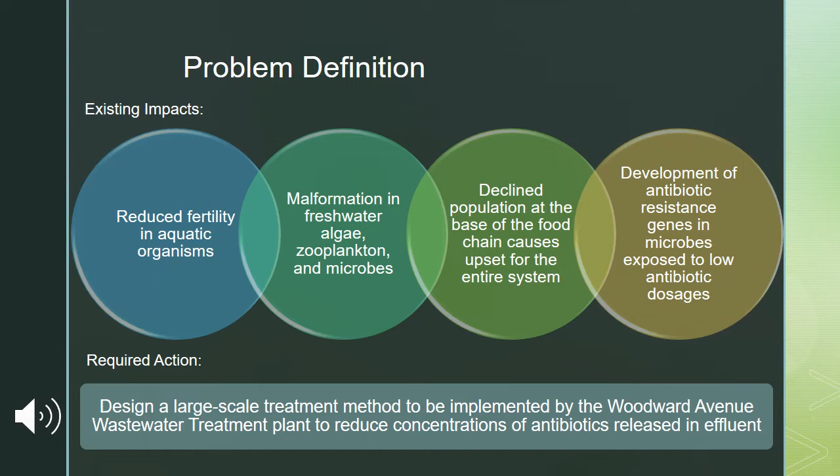As standards don't currently exist, we aligned our targets with the efforts of the Hamilton Clean Harbour Program, which set out to improve water quality and undo environmental damage caused by decades of neglect. The chosen antibiotic indicator for the project is sulfamethoxazole. Sulfamethoxazole of the sulfonamide group is among the most prescribed treatments for urinary tract infections in Canada. In North America, it is the antibiotic with the highest groundwater and surface water concentrations.

In Hamilton Harbour, sulfamethoxazole has a major presence in the effluent from the wastewater treatment plant and downstream, at concentrations of 23.8 nanograms per liter and 2.5 nanograms per liter, respectively. The incentive of this project is to address antibiotic contamination in Hamilton Harbour by proposing a reduction in future influent concentrations. This is an alternative to remediation of the present state of the harbour, which can also be separately investigated. We aim to reduce concentrations in effluent from Woodward Avenue wastewater treatment plant, having the largest contribution among other point sources that drain into the harbour.

An indicator antibiotic was chosen to be able to represent the overall degree of removal expected across all varieties of antibiotics, that is, sulfamethoxazole. In order to achieve this, we are proposing a membrane bioreactor system that can be retrofitted at the plant and will capture many antibiotics and other contaminants, targeting sulfamethoxazole. The treatment system will receive all influent currently received from wastewater collection, excluding the wet weather bypass system. 409 megaliters per day will be treated with a target removal efficiency of 65%, selected on the basis of several bench-scale studies that have claimed to achieve no lower than this percentage.

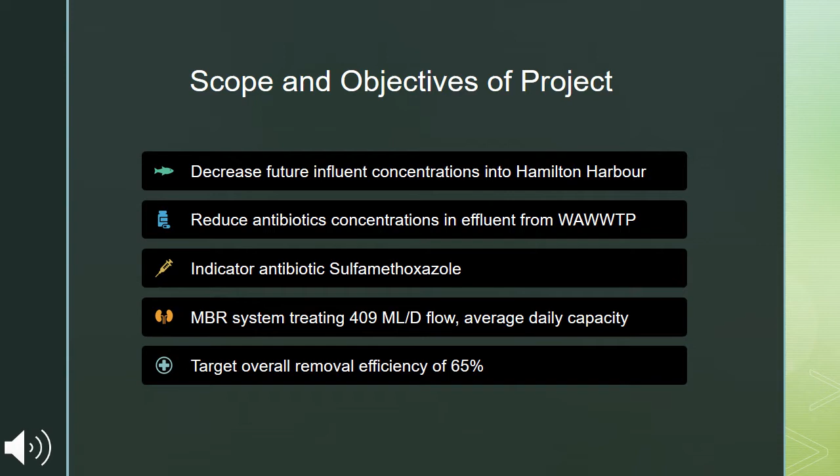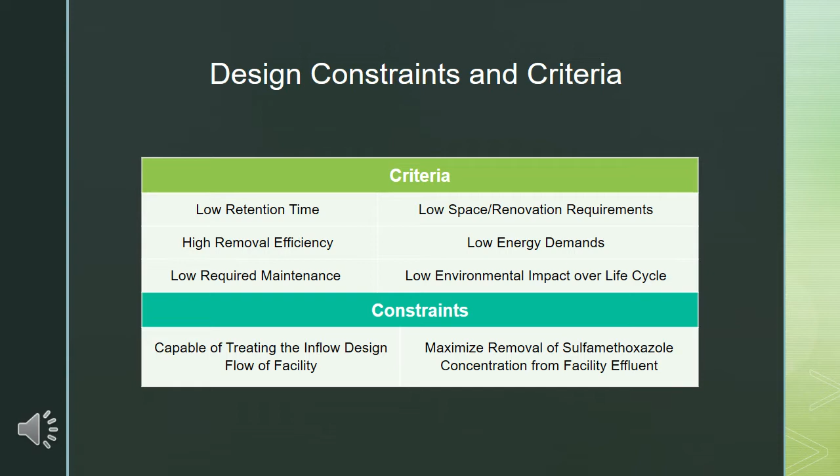As can be seen in the table below, there were a variety of criteria and constraints considered in our design. The criteria were, in general, selected in order to maximize the system efficiency while minimizing the economic and environmental impacts. Meanwhile, the constraints were selected according to the scope and involved maximizing the antibiotic concentration removal as well as the design capability to treat the facility influent rate. The design process began with researching site-specific information, including plant schematics, effluent requirements, primary effluent, and aeration data specific to where our design solution would be implemented.

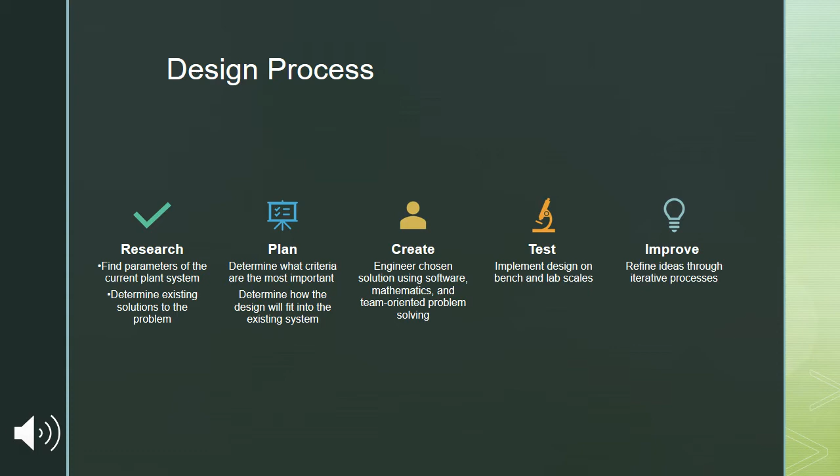Next, current solutions on the market were researched. Focus was placed on the least intrusive designs that could be retrofitted to the current plant. The most effective designs were advanced oxidation processes and membrane reactors. Preliminary calculations for cost, efficiency, and environmental impact were carried out and then implemented into a multiple criteria decision analysis matrix. After completing a sensitivity analysis, the chosen design was the membrane bioreactor.

To complete the technical aspects of this project, software such as SolidWorks and AutoCAD were used to model the design. OpenLCA and CapdetWorks were used to complete life cycle analysis of materials and preliminary costing of the design, respectively. Technical calculation knowledge was used from bio-wastewater treatment design, and membrane efficiency, sizing, and fouling treatment was determined. To keep all aspects of the project on track, a digital timeline was created in the form of a Gantt chart.

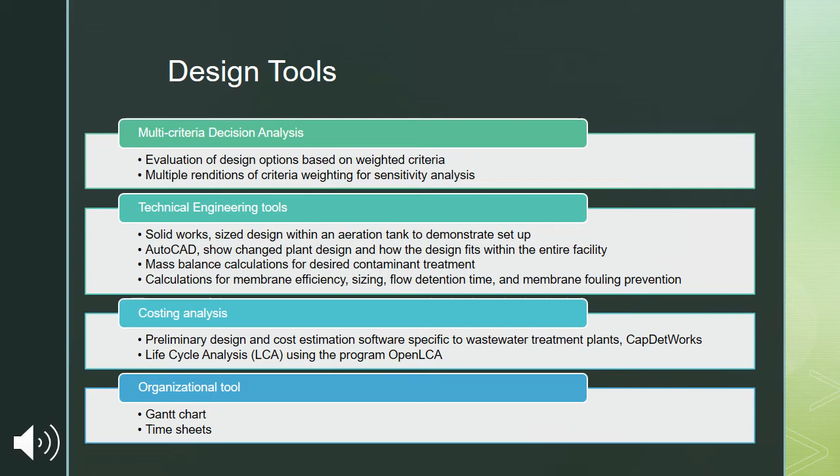The final design is a membrane bioreactor system that will integrate with the existing infrastructure at the Woodward Avenue wastewater treatment plant. A membrane bioreactor works by combining the commonly used activated sludge wastewater treatment process with high-level filtration. The wastewater treatment plant already follows the activated sludge process and has 8 aeration tanks in its north plant and 4 in its south plant. So, for our design, we will be integrating membrane modules into these existing tanks. Membrane bioreactor treatment will take place after preliminary and primary treatment stages. Given the high level of filtration, the existing secondary clarifier system can be removed, thus reducing the treatment plant's overall footprint.

As you can see in the diagram, the membrane bioreactor will consist of multiple membrane sheets stacked together into larger sets and submerged within an aeration tank. Treated water will be removed with the help of a vacuum. Sludge will also be removed, but some will be returned to the tank to help maintain biological growth. The return activated sludge flow rate will be about 81.3 million liters per day for the north plant and 40.2 million liters per day for the south plant.

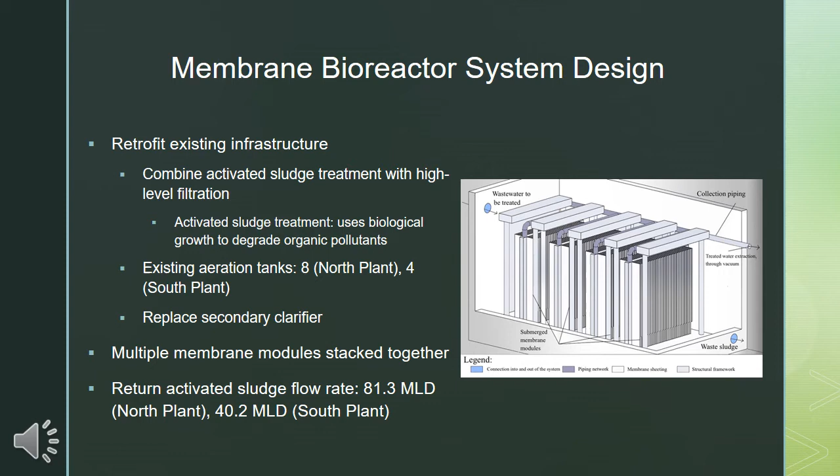Different parts of the membrane bioreactor system will require different materials. The polyvinylidene fluoride of the membranes will allow pore size to be adjusted relatively easily, while the stainless steel 316 of the submerged air mains will minimize corrosion. The exposed collection pipes will be made of polyvinyl chloride to protect them from sun decay. The membranes will have a configuration of hollow fibers, which will allow for ultrafiltration and the removal of antibiotic particles. The design of the membrane is based off an existing product called GE Zenon 500, which matches the criteria of this project. Approximately 11,600 to 18,100 membranes will be needed for each aeration tank, depending on the plant.

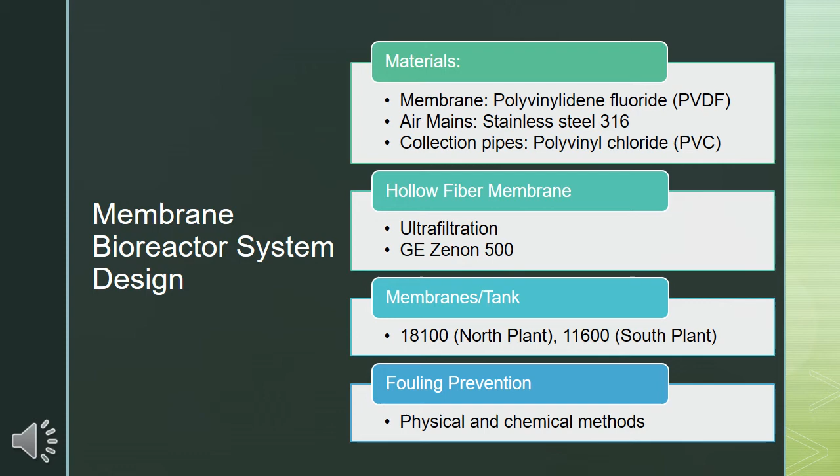The membranes will take up approximately 22% of the total tank space. Membrane fouling will be prevented through permeate relaxation cycles. For a 10-minute cycle, the filtration and permeate circulation will be on for 9.5 minutes and off for 0.5 minutes. This may be combined with backwashing, where permeate is pumped in the opposite direction to clean out the membrane. Chemical cleaning will also take place on a weekly basis using citric acid.

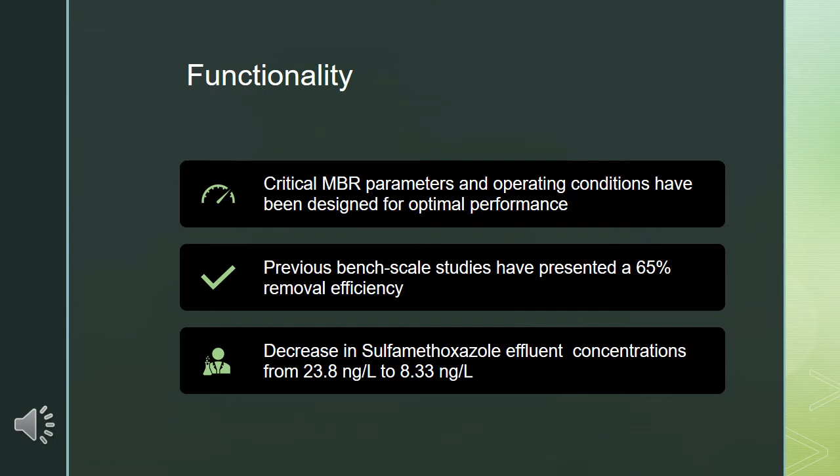When applied to the Woodward Avenue wastewater treatment plant, a sulfamethoxazole concentration decline from 23.8 nanograms per liter to 8.33 nanograms per liter would be observed. Safety precautions for workers include wearing personal protective equipment, which can include glasses with side shields, hard hats, full face shields, ear protection, gloves, and safety boots. Personal cleanliness practices, such as washing hands with antibacterial soap, will help reduce health risks. Education is also of high importance.

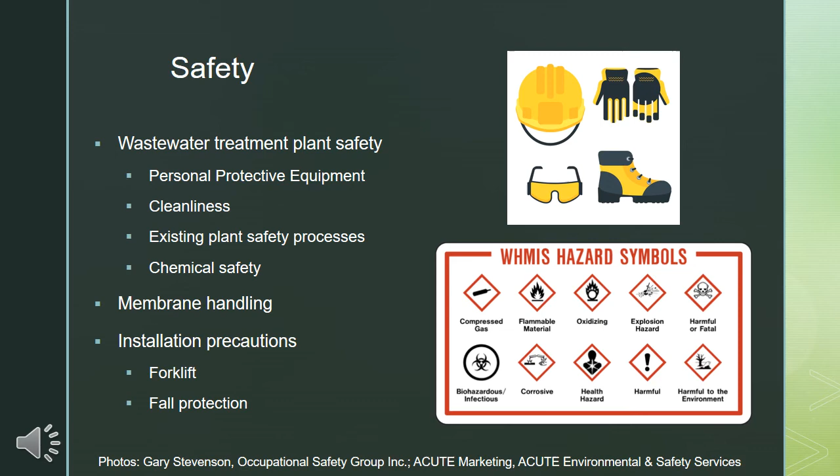Workers must be made aware of all plant safety measures such as emergency shutoff switches, eye washing and shower stations, and job-specific precautions. They must also be made aware of WHMIS symbols and chemical handling safety and be provided with material safety data sheets for any chemicals they may come in contact with. Membranes themselves should be kept moist at all times and protected from freezing temperatures, sharp objects, and entanglement. They should not be exposed to high-pressure washing. When installing membranes, workers must employ safe forklift practices when lifting membrane modules and wear proper fall protection when installing them, such as a harness and tie-off lanyards.

Hamilton Harbor is an area of concern due to its poor water quality and environmental health. 50% of the flows into the harbor are coming from wastewater treatment plants, including the Woodward Avenue plant. So improving the quality of its effluent has an important impact on the water quality in the harbor and the ecological health of the area. Our design is a form of ultrafiltration, which, in addition to antibiotics, can remove cryptosporidium, bacteria, most viruses and colloids, and some endotoxins or pyrogens, which are compounds that can cause illness.

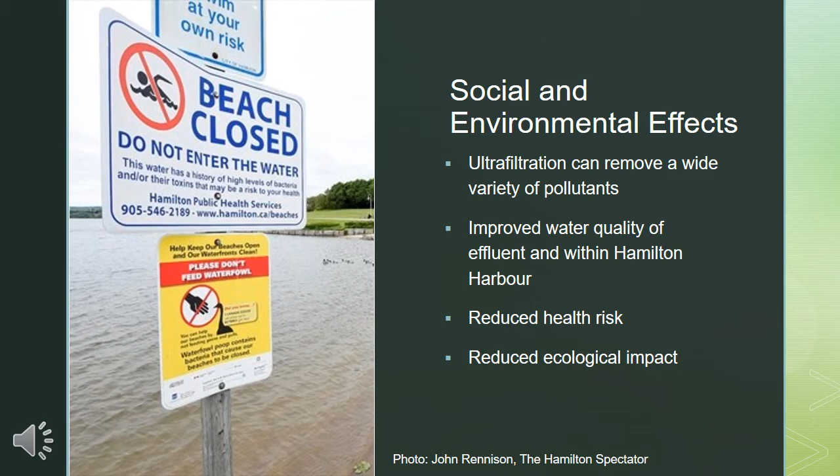While the harbor is currently not swimmable due to the presence of blue-green algae, there are still routes for potential human exposure and the resulting health risks that would be reduced with improved water quality. Improving quality may eventually make the harbor safe enough for recreational purposes as well. The successful implementation of the solution would also allow it to act as a reference site for decision makers when considering other potential sites.

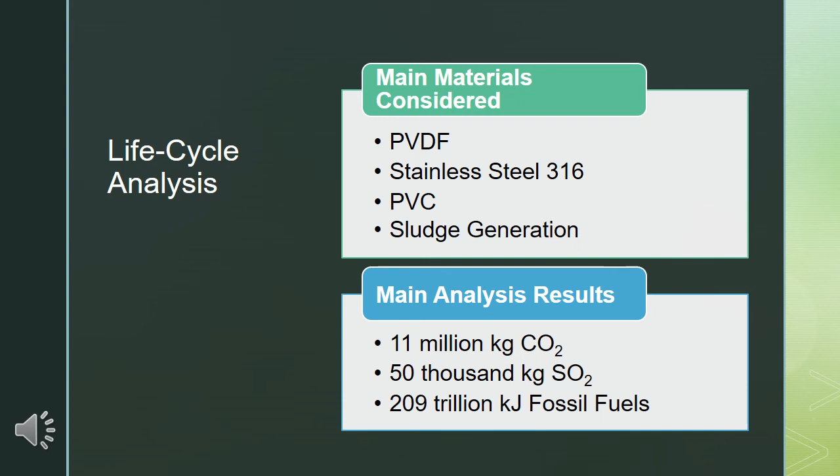The life cycle analysis was performed using OpenLCA software and has considered the main material resources required and byproducts generated during manufacture, operation and maintenance, and end-of-life disposal. This analysis has concluded that over a 10-year membrane life, approximately 11 million kilograms of carbon dioxide and 50,000 kilograms of sulfur dioxide would be generated, while 209 trillion kilojoules of fossil fuels would be consumed. Any LCA discrepancies could be due to the available materials on the software or any assumptions made when estimating the amount of system inputs and outputs.

Capital cost of the project was estimated using CapdetWorks, a financial software that is specific to wastewater treatment designs. Individual breakdowns have been completed for one-time and annual costs. The cost of construction was $43.9 million based on the model, and this is the total cost for implementing membranes to all 12 aeration tanks, making individual tank membrane implementation approximately $3.6 million. Engineering costs from our team are estimated at $59,000. Annual fees for upkeep of the design were also calculated. Additional costs to the project include unforeseen or indirect costs, such as legal fees, inspection costs, and interest accumulated during construction. Therefore, the total project cost is approximately $53 million.

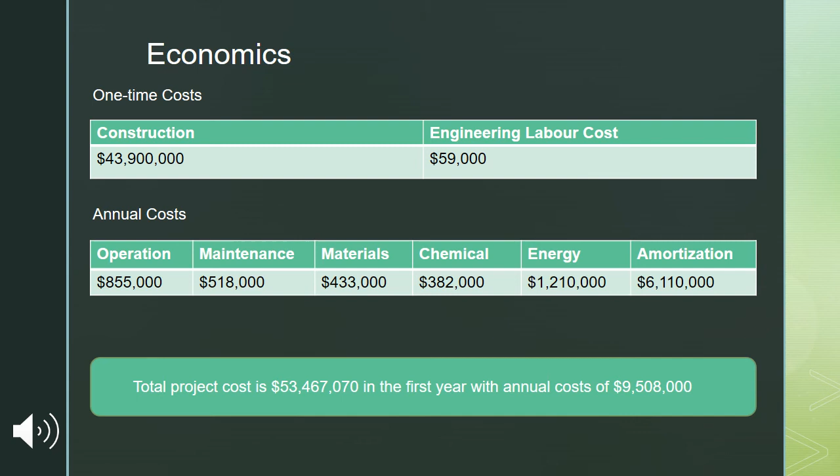The primary uncertainty and associated risk with the MBR system is scalability and performance at a larger scale, that is, the full-scale system proposed. The majority of bench scale studies describe approximately 65% removal in the laboratory. However, it is expected that with higher flow rates and more complex flow composition, the removal efficiency at full scale will be lower by a factor. However, the MBR system is expected to remove other antibiotics and general contaminants for a higher overall removal efficiency. Hence, the reduction in sulfamethoxazole removal alone may be offset by the range of contaminant treatment occurring. This way, a 65% overall removal efficiency is realistic for the system with low risk of underperformance.

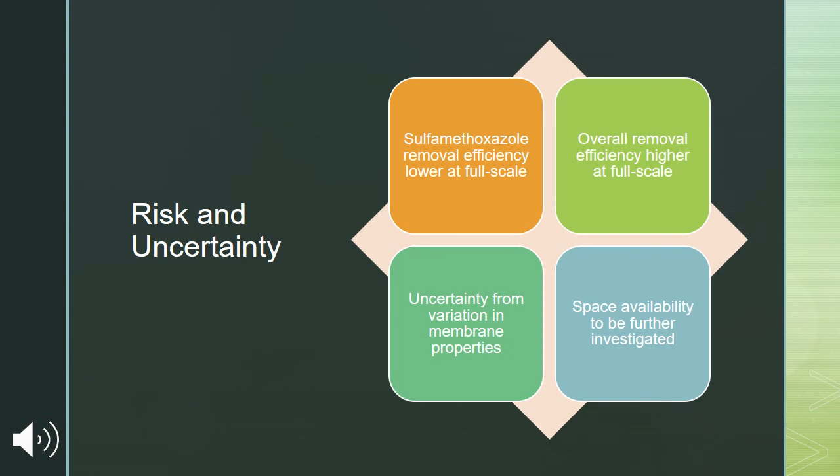Space availability for the length of the MBR system at the existing plant must also be further investigated. Through a pilot-scale project, an actual removal efficiency can be determined, as well as the degree of error associated with design parameters arising from variation in membrane properties.

Critical parameters for the design and operation of the proposed MBR system were found, using commercial membrane and known plant specifications, and a 65% overall sulfamethoxazole removal efficiency. Cost was found to be about $53.5 million within the first year, with annual costs of $9.5 million. Life cycle analysis found that 11 million kilograms of CO2 and 50,000 kilograms of SO2 would be generated. A pilot project with a representative MBR unit and monitoring would need to be conducted to determine actual operating conditions and removal efficiency before full-scale implementation.